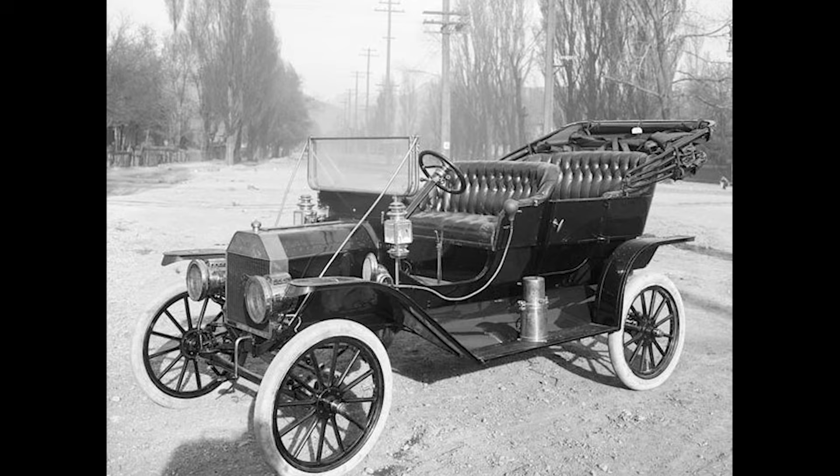Palm Beach, Florida, January 1905. The morning air carried the salt tang of the Atlantic as spectators gathered along Ormond Beach to witness the impossible: automobiles racing at 90 miles per hour across hard-packed sand.

Steam hissed from overheated radiators. Steel ground against steel as mechanics made final adjustments. The crowd pressed forward, expecting another demonstration of European automotive superiority.

Then Louis Chevrolet's French Fiat lost control. The machine cartwheeled across the beach in a spectacular cloud of sand and twisted metal. While other spectators rubbernecked at the carnage, one American engineer walked methodically through the debris field.

Henry Ford picked up a bent valve stem, no bigger than his thumb, 30% lighter than American parts. Yet when he tried to break it over his knee, nothing. The metal bent like putty but refused to snap.

Every major American steel producer would soon tell Ford the same thing: can't be done, not commercially. The infrastructure didn't exist. The expertise didn't exist. European metallurgy was generations ahead of American capabilities.

But that fragment of impossible French steel would trigger the most decisive materials revolution in automotive history, proving that sometimes the greatest American innovations begin by stealing European secrets and making them better.

Ford climbed down from his Model K race car, its engine still ticking from the morning's speed trials, and surveyed the wreckage scattered across 200 yards of Ormond Beach sand.

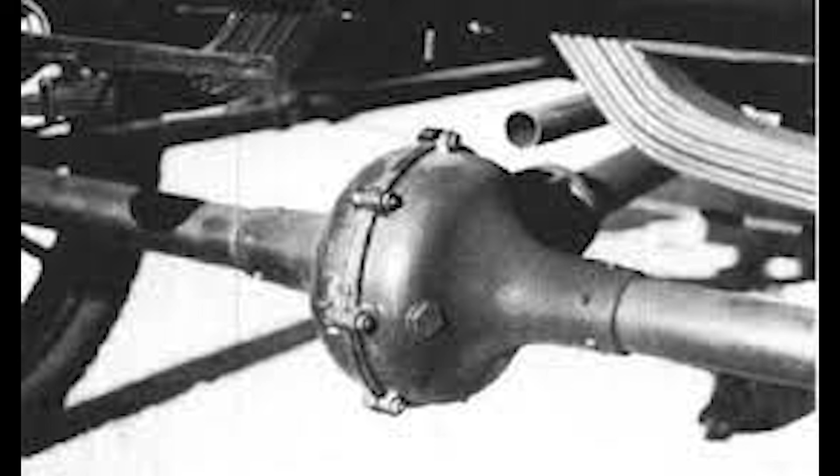A crankcase here, cast iron, probably German. Brake drums there, standard carbon steel, unremarkable. Then his boot struck something that rang with a different tone.

Ford knelt and extracted a valve stem from the sand, brushing away the grit with calloused fingers. The part weighed exactly what he expected, except it was 30% lighter than equivalent American components.

Ford held it up to the Florida sunlight, studying the metal's grain structure through its bent surface. Clean break lines where stress had exceeded material limits. No brittle fracturing, no crystalline failure patterns that plagued American racing parts. This steel had deformed predictably, absorbing energy instead of shattering.

Alexander Winton appeared at Ford's shoulder, breathing hard from his jog across the beach. "Spectacular crash," he panted, mopping his forehead with a silk handkerchief. "French drivers always push too hard. That's what you get with European showboating."

Ford extended the valve stem toward his chief rival. "Look at this." Winton barely glanced at the twisted metal. "Broken part from a broken car. What's your point, Henry?" "Try to break it." "What are you, 12 years old?"

But Winton took the valve stem anyway, gripping it with both hands. He applied steady pressure, expecting the steel to snap cleanly. Instead, the metal bent further, forming a neat U-shape without cracking. Winton frowned and reversed his grip, trying to straighten the part. It returned to within 5 degrees of its original configuration.

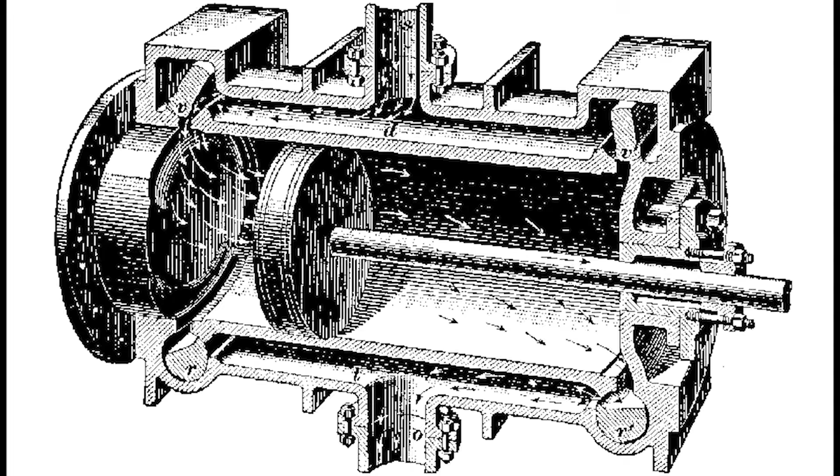The French steel contained trace amounts of vanadium, a rare element that Ford had never heard of, and Wills had encountered only in academic papers from European research institutes. At concentrations of just 0.2%, vanadium transformed ordinary steel into something extraordinary.

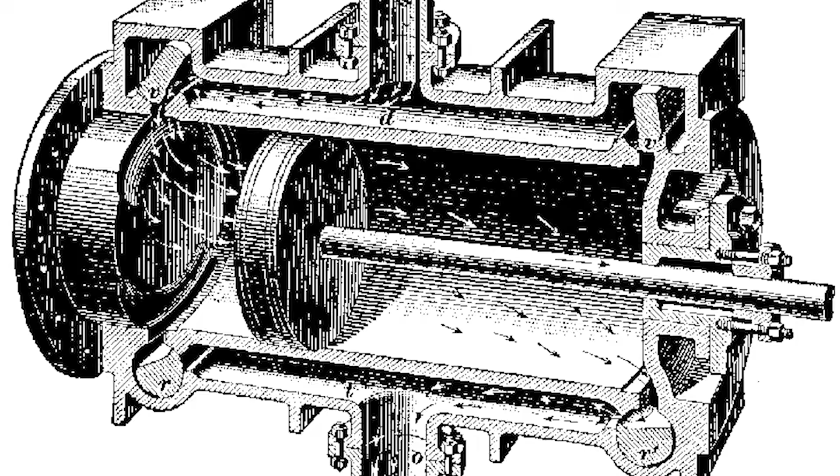Instead of failing catastrophically when stressed beyond its limits, vanadium steel absorbed energy and returned to shape. It was 30% lighter than carbon steel, but could withstand nearly three times the stress before permanent deformation.

"It's impossible," Wills reported, spreading his test results across Ford's desk. "By every principle of metallurgy I understand, adding such a small amount of any element shouldn't produce this dramatic a change in material properties." Ford studied the numbers: tensile strength, compression resistance, fatigue limits that exceeded anything American steel producers claimed possible.

"But it works." "It works. The question is whether we can make it work here."

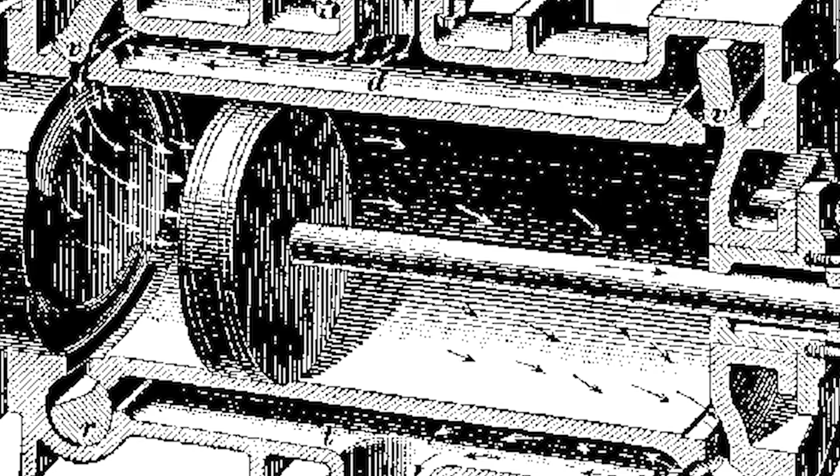That question led Ford to contact every major American steel producer, from Carnegie Steel's massive Pittsburgh operations to Bethlehem Steel's integrated mills. He described vanadium steel's properties, provided sample analysis, and offered substantial contracts for regular production quantities.

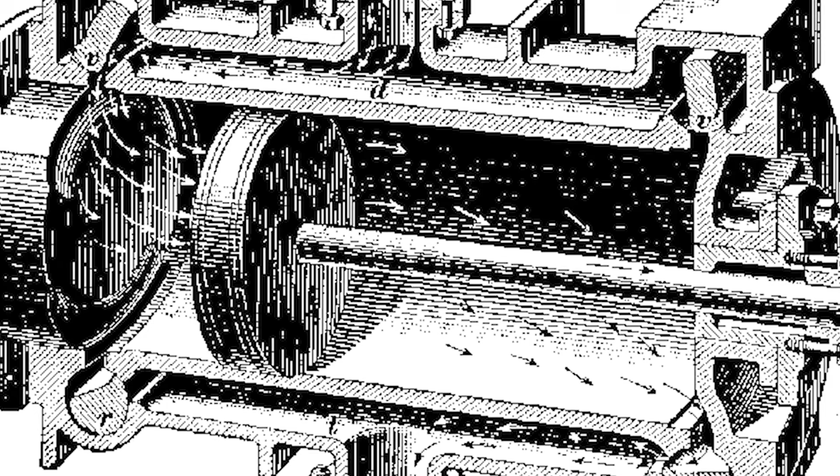The responses were unanimous: "Can't be done, not commercially." Carnegie's chief metallurgist explained the thermal requirements. Vanadium demanded furnace temperatures of 3,000 degrees Fahrenheit. American blast furnaces maxed out at 2,700 degrees.

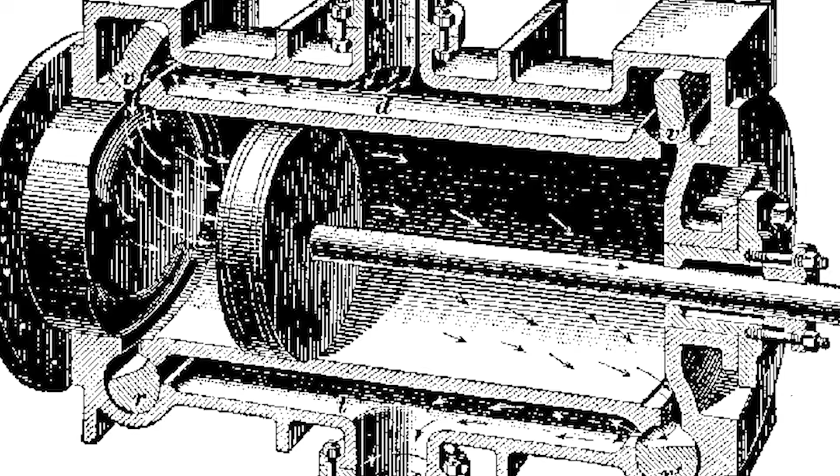The infrastructure didn't exist. Republic Steel's president outlined the economic impossibility. Retooling furnaces for exotic alloy production would cost hundreds of thousands of dollars with no guarantee of market demand. Bethlehem's engineering committee declared vanadium an interesting laboratory curiosity that would never prove viable for mass production.

Ford listened to each rejection with growing frustration, recognizing the same conservative thinking that had dismissed automobiles themselves just ten years earlier. These were the men who had built America's industrial might through incremental improvements and proven methods. They saw no profit in chasing European metallurgical experiments that might disrupt established production systems.

But sitting in his office with Wills's test results and the bent valve stem that had started everything, Ford realized he wasn't just chasing better steel. He was chasing the future of American manufacturing itself.

His vision of a universal car, affordable, durable, and mass-produced, required materials that could withstand punishment while remaining light enough to keep costs down. Standard carbon steel was too heavy and too weak. The French had cracked the code. Now Ford had to steal it, perfect it, and scale it beyond anything European manufacturers thought possible.

By spring of 1906, Ford had exhausted his list of major steel suppliers. Carnegie Steel's board had voted unanimously against vanadium experiments, citing excessive risk to established production systems. Bethlehem Steel's president wouldn't return Ford's telephone calls after their engineers calculated the infrastructure costs at over $2 million. United States Steel dismissed the project as chasing European racing novelties with no commercial applications.

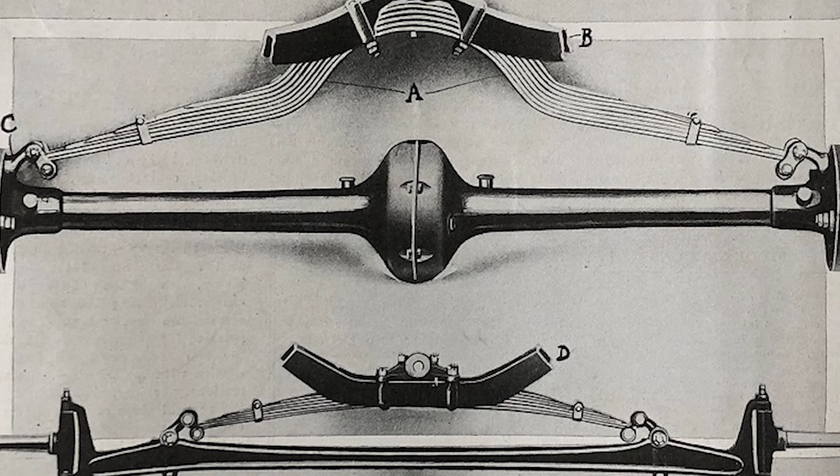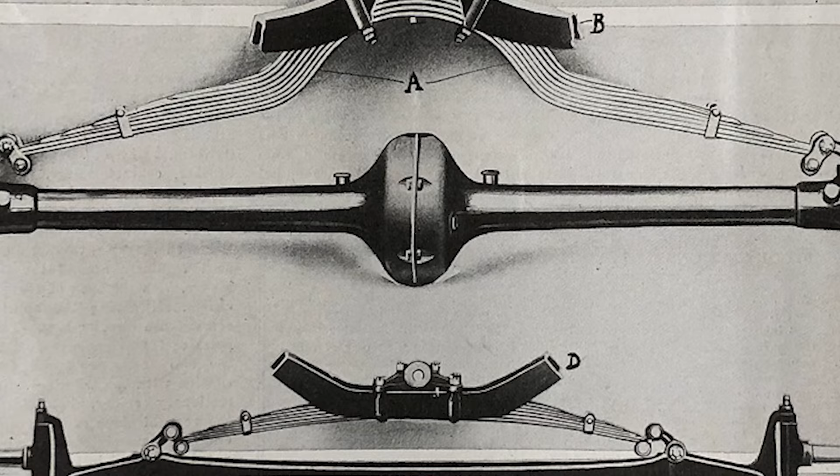"But we can do things they won't attempt: custom alloys, experimental processes, projects the big companies consider too risky for their standardized operations." Ford studied Republic's furnaces, smaller than the massive installations at Carnegie's Homestead Works, but equipped with modifications that suggested creative engineering: oxygen injection systems to boost combustion temperatures, refractory brick formulations designed for specialty applications, crucibles lined with materials Ford didn't recognize.

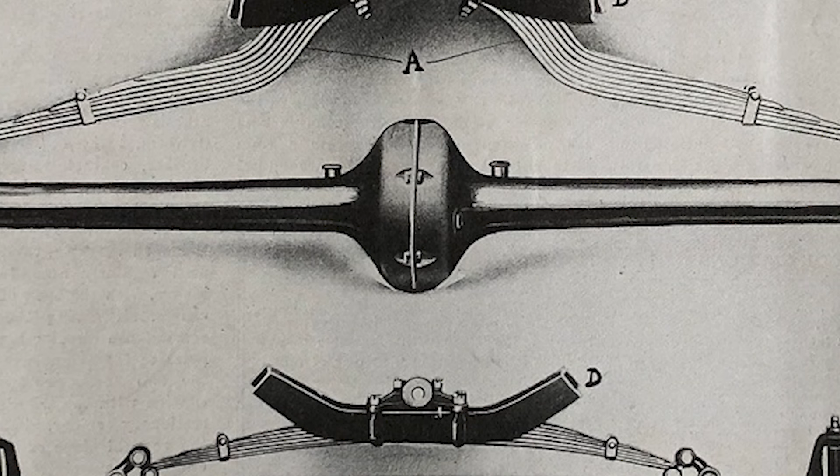"Can you reach 3,000 degrees?" Ford asked. Campbell exchanged glances with his chief metallurgist, an intense young man named Robert Archer, who looked like he spent more time with blast furnaces than barbers. "Not with our current setup, but we can modify the equipment. Question is, what's it worth to you?"

Ford's answer surprised even himself: "$47,000 for furnace modifications, plus guaranteed orders for 2,000 tons annually once you achieve commercial production." The sum represented Ford's entire startup capital from 1903, everything he had risked to launch Ford Motor Company. Campbell and Archer disappeared into urgent consultation, emerging 20 minutes later with a handshake agreement to attempt what America's largest steel producers had declared impossible.

The furnace modifications began immediately. Republic's engineers stripped out standard refractory brick and replaced it with experimental compositions that could withstand temperatures that would melt conventional furnace linings. They installed oxygen injection systems borrowed from European smelting operations, with pressure regulators that could boost combustion temperatures by controlling airflow precisely. New crucibles arrived from specialized manufacturers, lined with exotic materials that cost more per pound than finished steel.

October 1906 brought the first vanadium heat. Ford and Wills traveled to Canton to witness what they hoped would be the birth of American vanadium steel production. Republic's workers had been preparing for weeks, stockpiling coal and adjusting furnace parameters through dozens of small test runs. Campbell and Archer moved through final preparations with the nervous energy of men who understood they were betting their company's survival on untested metallurgy.

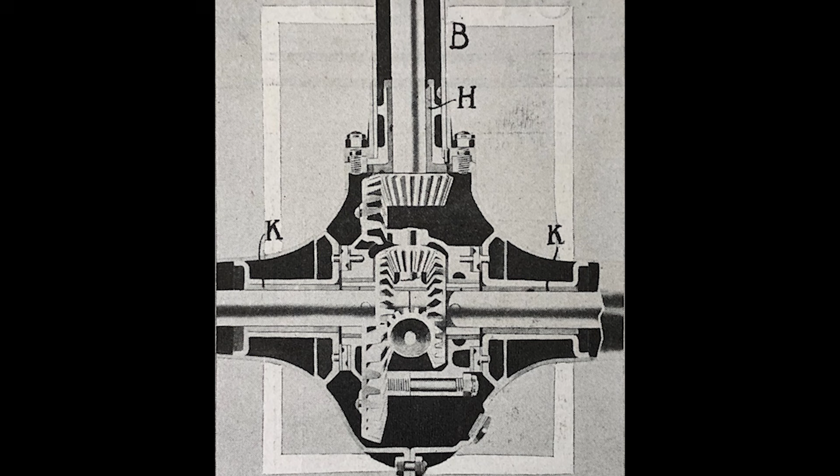Archer met him at the furnace with a revised plan that addressed each failure point from the previous attempt. Instead of maintaining maximum temperature throughout the entire process, they would reduce heat to 2,900 degrees once the vanadium began integrating with the iron matrix. Carbon content would be adjusted to 0.4%, high enough to provide hardness, low enough to maintain flexibility. Most critically, they would add the vanadium compounds during the cooling phase when the steel's molecular structure was crystallizing into its final form.

18 hours of continuous operation, Archer warned as workers began feeding coal into the furnace. "Once we start, we can't stop until the pour is complete. Temperature fluctuations will ruin everything."

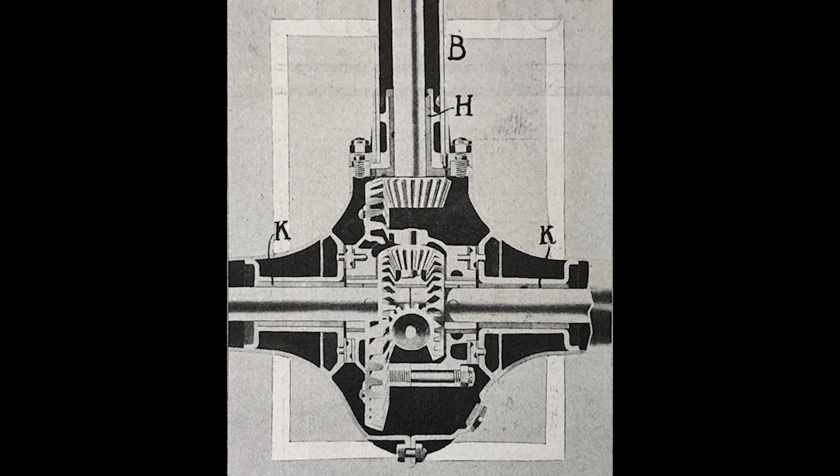The furnace reached operating temperature at dawn, its interior blazing with intensity that turned Republic's foundry floor into a landscape of shadows and glare. Workers moved through choreographed routines they had rehearsed dozens of times, adjusting oxygen flow, monitoring crucible temperature, preparing the specialized molds that would receive America's first successful vanadium steel. Steam rose from cooling systems as the facility's steam engines powered massive bellows that maintained precise combustion conditions.

Ford arrived from Detroit at midday, finding Republic's entire workforce focused on the single furnace that represented their company's future. Campbell paced the foundry floor like a general monitoring a crucial battle, consulting temperature gauges and conferring with Archer about chemical reactions occurring inside the white-hot crucible. The air itself seemed charged with possibility and the metallic taste of industrial ambition.

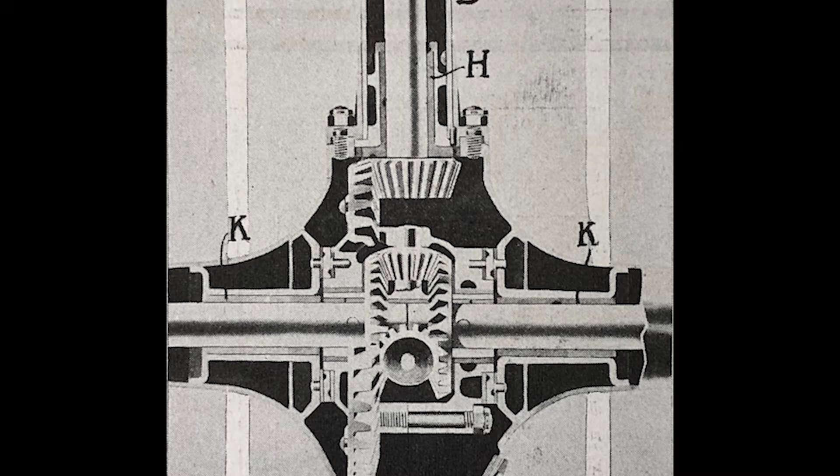By afternoon, the furnace had consumed 4 tons of coal and reached the critical moment when vanadium compounds would be introduced to the molten steel. Archer supervised personally, adding measured quantities of vanadium oxide at precisely calculated intervals. Each addition sent showers of sparks cascading from the furnace mouth as exotic metals integrated with American iron ore in combinations that had never been achieved on commercial scale.

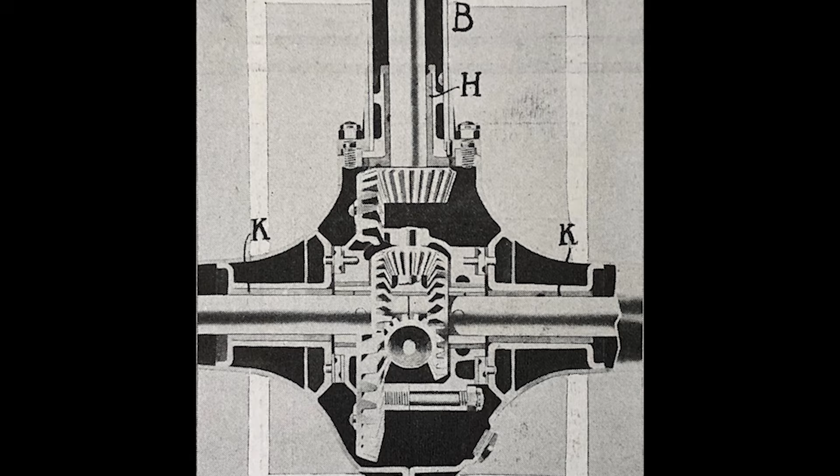The pour began at sunset, with molten steel flowing into molds at temperatures that required workers to wear protective equipment borrowed from glass manufacturing operations. Unlike the October disaster, this steel moved with the smooth consistency that indicated proper molecular integration. No excessive slag, no separation of materials. The vanadium was bonding with the iron matrix exactly as European research suggested it should.

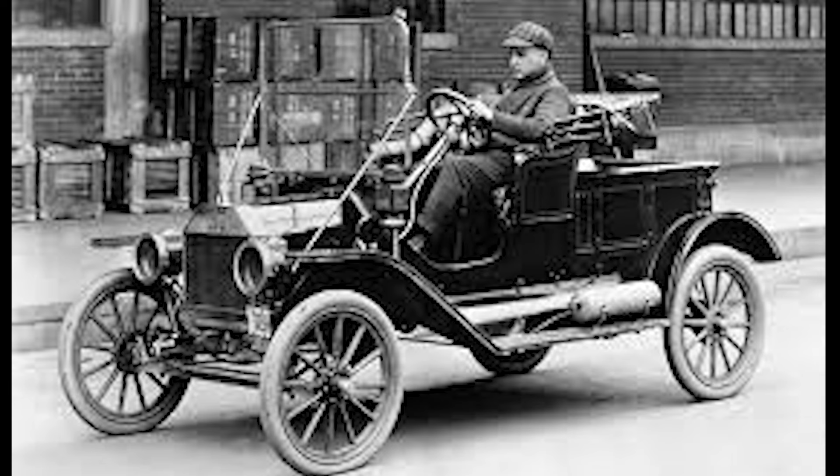But the real test came when the steel cooled enough for chemical analysis. Wills worked through the night with sample specimens, measuring vanadium content with precision instruments borrowed from Republic's Quality Control Laboratory. The results exceeded every expectation, exactly 25 hundredths of 1% vanadium distributed evenly throughout the steel's molecular structure. When tested for tensile strength, the steel hit 170,000 pounds per square inch, exactly matching the French valve stem that had started Ford's obsession.

But Ford demanded more comprehensive testing before celebrating success. He wanted to understand how vanadium steel behaved under different stresses that automobiles would encounter on American roads. Wills subjected sample bars to compression testing, twisting them until conventional steel would have snapped. The vanadium specimens bent beyond 90 degrees and returned to within 5 degrees of their original shape.

Torsion tests revealed similar resilience. The steel absorbed energy that would fracture carbon steel and released it gradually as the metal returned to its unstressed configuration. Most remarkably, fatigue testing showed that vanadium steel could withstand repeated stress cycles that would crack conventional materials.

Wills subjected sample rods to thousands of flex cycles, simulating the constant vibration and impact that automobile components experienced during normal operation. Carbon steel samples failed after 3,000 cycles. Vanadium steel was still performing perfectly after 15,000 cycles.

Ford studied the test results with the satisfaction of a man who had bet everything on superior technology and watched systematic engineering triumph over conventional wisdom. Republic Steel had achieved what Carnegie and Bethlehem declared impossible: commercial production of vanadium steel that exceeded European specifications. But as Ford examined the numbers, he realized Republic had given him more than better steel. They had created smarter steel.

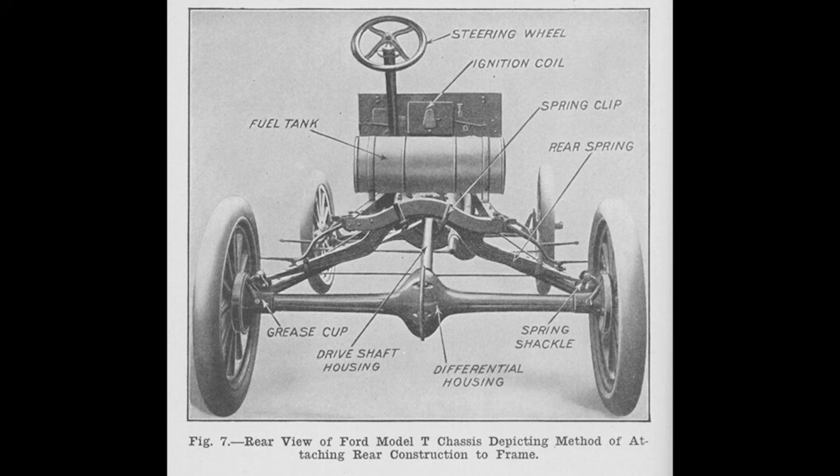Ford watched the crisis unfold from his Piquette Avenue office, tracking steel prices that fluctuated wildly as desperate suppliers sought any buyers willing to honor existing contracts. Carnegie Steel laid off 30,000 workers. Bethlehem Steel shut down entire production facilities. The industrial giants that had dismissed Ford's vanadium experiments were now fighting for survival in markets that had vanished almost overnight.

Republic Steel found itself hemorrhaging money on specialized vanadium operations that served a single customer in an industry many experts predicted would collapse entirely.

Campbell telephoned Ford with increasingly desperate updates: bank credit lines canceled, raw material suppliers demanding cash payments, workers threatening strikes over delayed wages. The modifications that had enabled vanadium steel production now seemed like expensive mistakes that would bankrupt the company. 'We might have to shut down the vanadium furnaces,' Campbell admitted during a particularly grim conversation.

'Standard carbon steel at least has multiple buyers,' he said. 'Vanadium is too specialized for a market this unstable.'

Ford understood the mathematics of Campbell's situation. Republic had invested everything in equipment that served essentially one customer. If Ford Motor Company failed during the financial crisis, Republic would own the world's most expensive scrap metal. The smart business decision was to abandon vanadium production and return to conventional steel that could be sold to multiple industries.

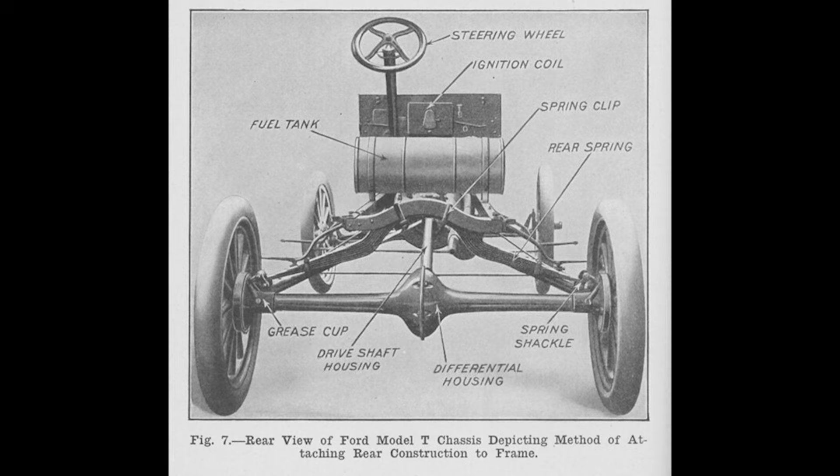Meanwhile, competitors were using the financial crisis to attack vanadium steel's reputation. Ransom Olds, whose Oldsmobile company represented conservative engineering philosophy, began spreading concerns about untested materials in consumer products.

'Vanadium is too new,' he warned automotive journalists. 'Nobody knows how it ages under real-world conditions. What happens when these experimental cars start failing after 2 or 3 years?'

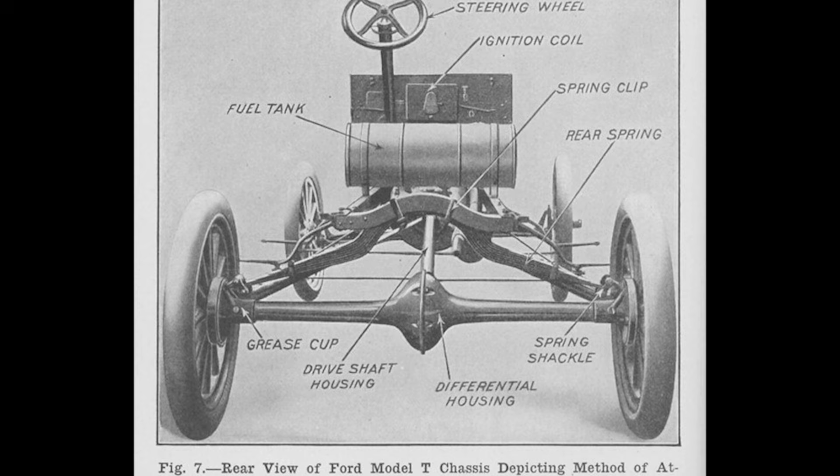The attack found its target when a Model N suffered a highly publicized axle failure in downtown Detroit, stranding its owner in heavy traffic and requiring a team of horses to tow the vehicle to safety. Newspapers covered the incident as evidence that Ford's European innovations were failing American customers. Orders plummeted as potential buyers questioned whether vanadium steel could be trusted for daily transportation.

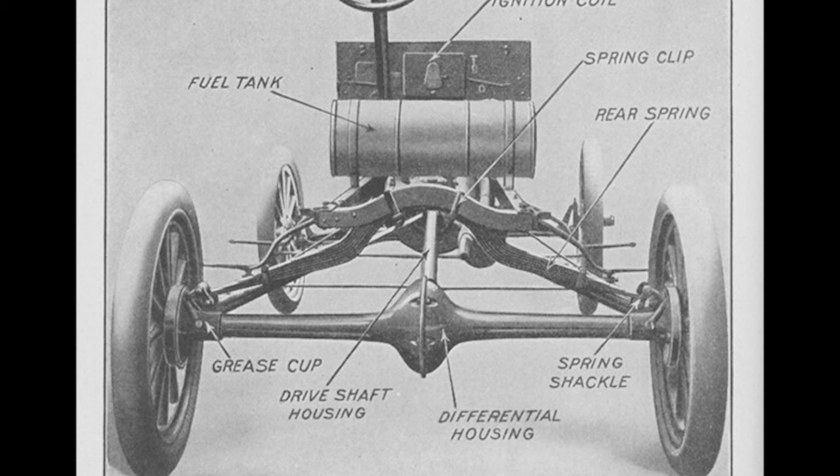Ford and Wills investigated the failure personally, traveling to the repair shop where the damaged Model N sat with its rear axle twisted into an S-curve that would have snapped conventional carbon steel cleanly. But the vanadium steel hadn't snapped. It had deformed exactly as designed, absorbing energy that would have caused catastrophic failure in standard materials.

"Look at this," Wills said, pointing to the damaged axle. "Carbon steel would have broken into two pieces, probably launching the rear wheels into traffic. The vanadium steel bent but held together, keeping the vehicle controllable."

The investigation revealed improper heat treatment at Republic Steel, a single batch of axles that had been cooled too rapidly, creating internal stresses that compromised the vanadium's molecular integration. It was a quality control failure, not a fundamental problem with vanadium metallurgy.

But public perception focused on the dramatic photographs of twisted axles, rather than the technical explanation of why the failure had been survivable. Ford realized he was fighting a war on two fronts: a financial crisis that threatened his supply chain, and a public relations disaster that questioned his fundamental engineering choices.

Conventional wisdom suggested retreating to proven materials and conservative designs that wouldn't challenge customer expectations. Every business advisor recommended abandoning vanadium experiments and focusing on reliable carbon steel construction.

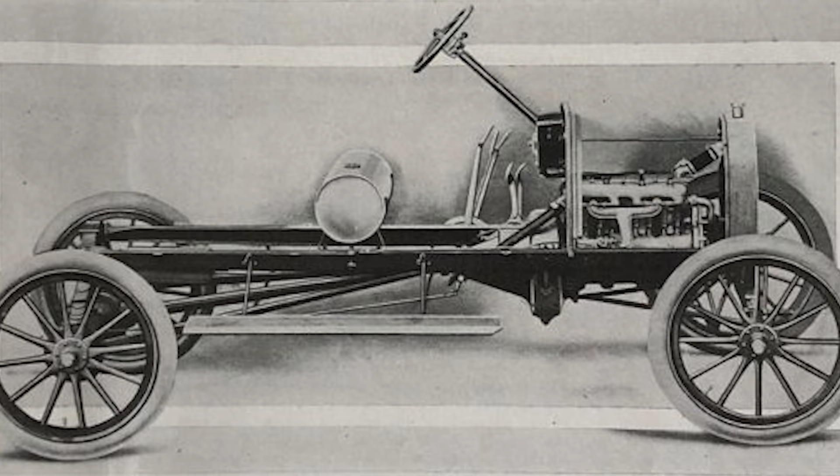October 1st, 1908. Ford stood in the Piquette Avenue plant watching workers assemble the first production Model T, its black chassis gleaming under electric lights that had replaced the gas flames of earlier manufacturing operations. Twenty-nine different vanadium steel components formed the vehicle's skeleton, each piece engineered to exploit the metal's unique properties rather than simply substituting superior materials into conventional designs.

The Model T represented three years of obsessive engineering that transformed Ford's vanadium gamble into systematic manufacturing advantage. Instead of building another automobile that happened to use better steel, Ford had created a machine designed around vanadium steel's ability to absorb punishment and return to shape.

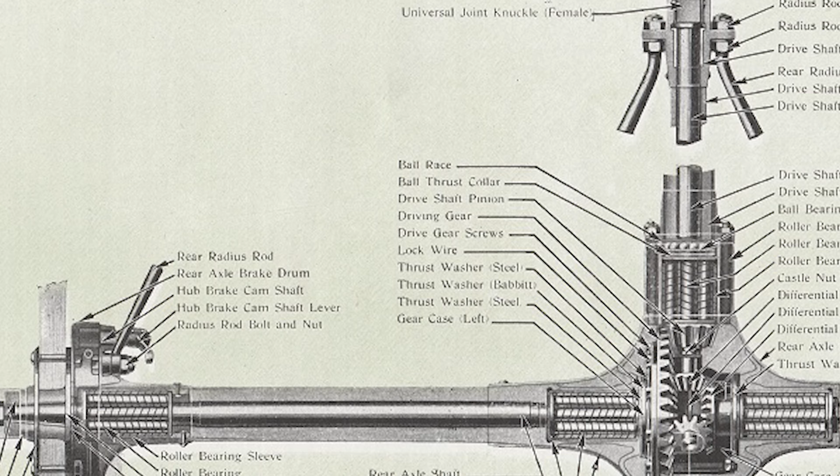Every component reflected this philosophy, from crankshafts that could twist through stress loads that would snap carbon steel to chassis members that flexed with road impacts instead of transferring shock to passengers. Wills supervised the final assembly with satisfaction that came from solving impossible metallurgical puzzles through systematic American engineering.

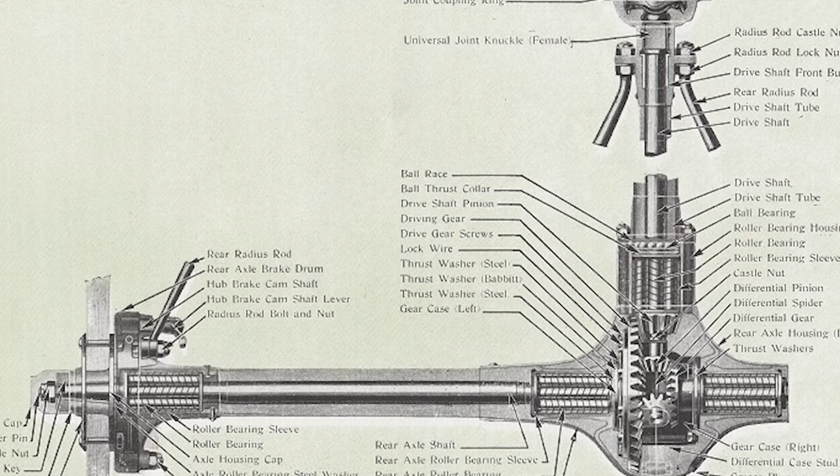The high-carbon vanadium crankshaft could withstand torsional loads of 12,000 foot-pounds, triple the stress that destroyed conventional engines. Low-carbon vanadium axles absorbed road shocks that would fracture standard steel, distributing impact energy through controlled flexing that protected wheel bearings and suspension components. But Ford's greatest innovation lay in optimizing 20 different vanadium formulations for specific applications throughout the vehicle.

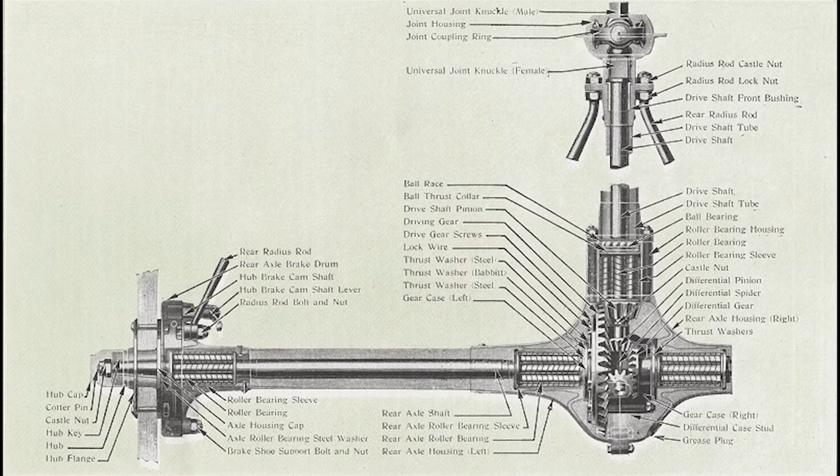The Model T's performance specifications read like fantasy compared to conventional automobiles. Front axles designed to support 1,200 pounds of vehicle weight tested to 4,800 pounds without failure, a four-to-one safety margin that no competitor could match.

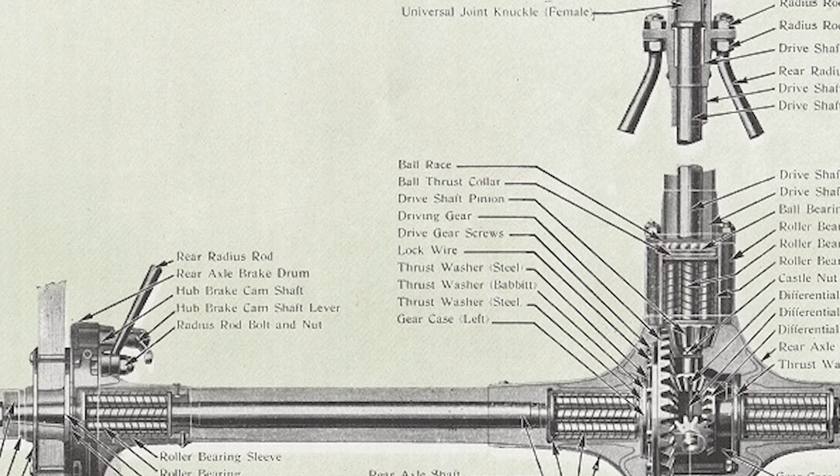Rear axles could twist through 180 degrees and return to true, absorbing impacts that would disable standard vehicles permanently. Ford backed these claims with the most audacious marketing promise in automotive history. Built for any road, any load, any weather, proclaimed advertisements that challenged customers to find conditions the Model T couldn't handle. It was industrial bragging that would either establish American manufacturing supremacy or destroy Ford Motor Company if the vehicles failed to meet their ambitious specifications.

The real test came not in Ford's factory, but on America's primitive road system, where Model T automobiles encountered conditions that European engineers never imagined. Railroad ties laid across muddy tracks served as bridges in rural areas. Creek beds became temporary roads during seasonal flooding. Farmers used their automobiles to pull stumps, power threshing equipment, and transport loads that would overwhelm vehicles designed for European cobblestone streets.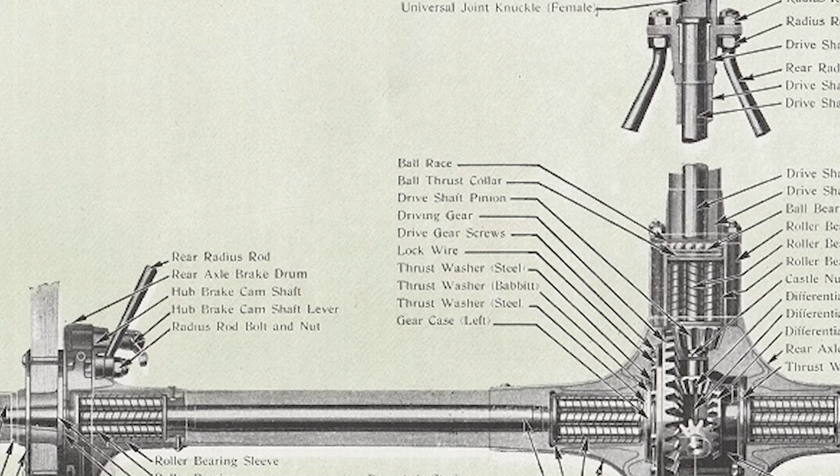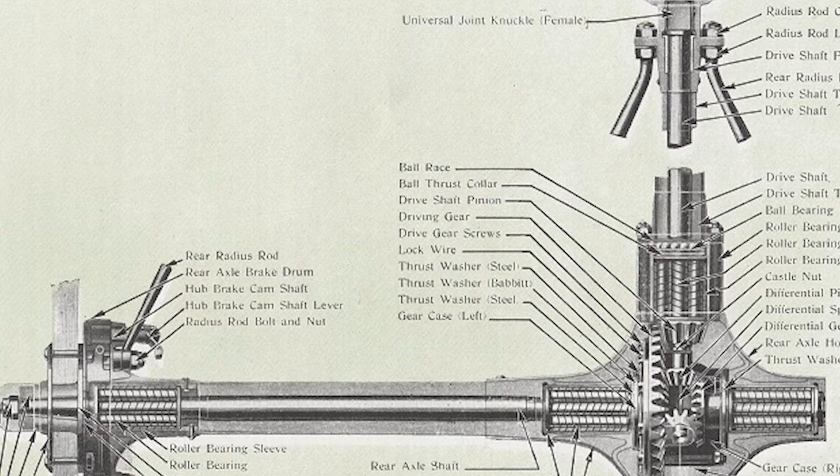Model T owners discovered that vanadium steel transformed these challenges from potential disasters into routine operations. Axles that bent under extreme loads straightened themselves when stress was removed. Chassis members that flexed over obstacles returned to proper alignment automatically. The vehicle absorbed punishment that would strand conventional automobiles and continued operating as if nothing had happened.

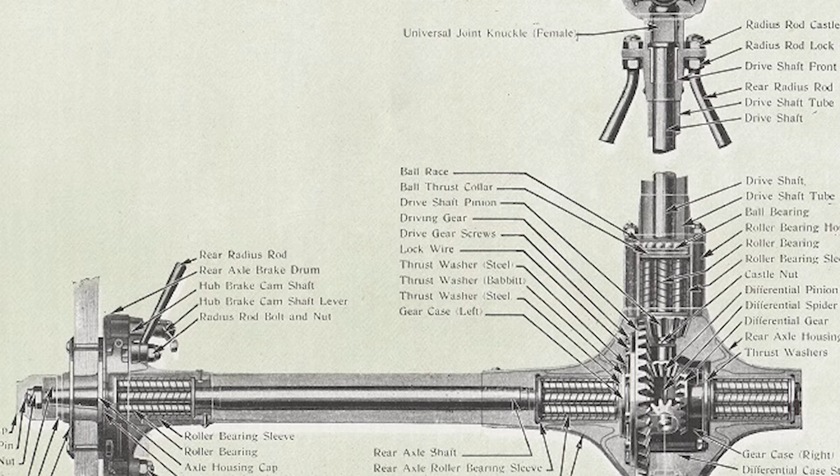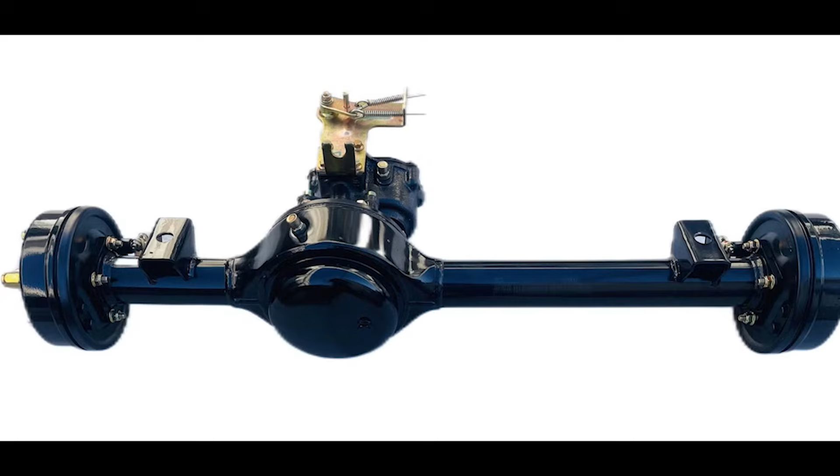The vindication Ford had sought since 1905 arrived through thousands of customer experiences that validated his vanadium obsession. A Montana rancher wrote to describe driving his Model T through a boulder field that destroyed two competitors' vehicles, with nothing worse than scratched paint to show for the ordeal. A Michigan logger reported using his automobile to skid timber loads over terrain that would have broken carbon steel axles within hours.

But the most dramatic proof came during Ford's own testing program, where company engineers subjected Model T vehicles to abuse that deliberately exceeded any reasonable operational expectations. They drove automobiles off loading docks to test impact resistance. They towed loads that tripled the vehicle's rated capacity. They operated in temperature extremes from Minnesota winters to Arizona deserts, documenting performance that no competitor could match.

Between 1908 and 1915, Ford captured 48% of the American automobile market through superior engineering that customers could experience in every mile of operation. The Model T's durability became legendary not through advertising claims, but through demonstrated performance under conditions that disabled competitive vehicles.

The production numbers told the story of American manufacturing triumph. Ford produced 15,000 Model T automobiles in 1909, 78,000 in 1912, and over 500,000 by 1916. Each vehicle contained those 29 vanadium steel components that had started as a French racing secret and evolved into the backbone of American automotive supremacy.

Republic Steel expanded its vanadium operations to supply Ford's massive production volumes, becoming the world's largest producer of specialty steel alloys. Campbell's company, which had nearly failed during the 1907 financial crisis, now employed over 3,000 workers in operations that served customers across multiple industries who had discovered vanadium steel's advantages.